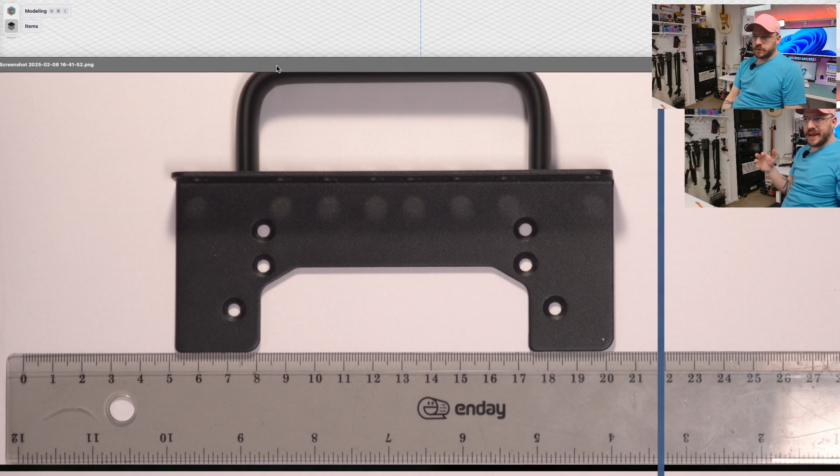This is my drafting software, Shapr3D. Any drafting software will do. So there's my picture, right? Having this ruler in the shot makes it so I can scale this perfectly with the drafting software.

So I'm going to move this out of here and come over to my drafting software. Obviously there's a good amount of drafting knowledge at play here that will take you a while to get, but I'll just show you the basics of what I'm doing.

Oh my God, please let me grab the fucking corner. Why are grabbable corners so small? Why are they so goddamn small? I'm just going to grab this image, and a lot of the time what I'll do, instead of trying to import the image into the drafting software, is just take the image on my computer and screenshot that. Except I can't grab the corners of this to make it bigger.

Okay, and yoink, coming over to drafting software, paste. No, drag and drop? I guess I do have to drag and drop, okay. So now I have this image in the drafting software. I'm going to move this up.

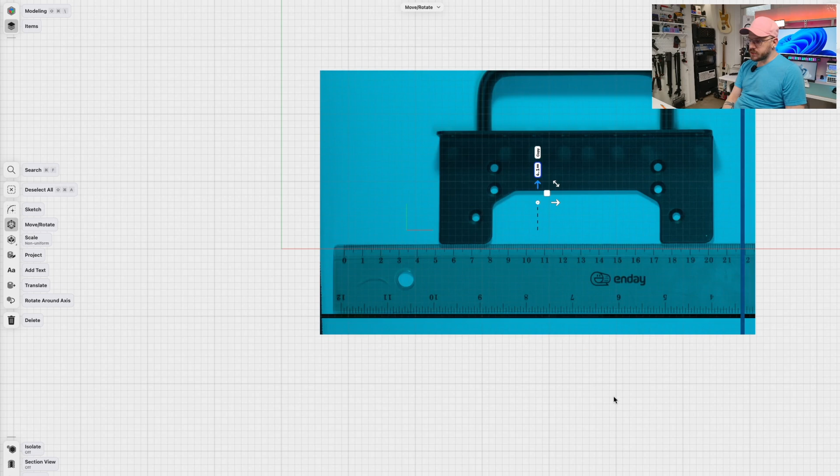A lot of times what you can do is, because I used guides in the image, this red line here, this axis, perfectly lines up with the ruler I have, which makes things super easy. Now, one thing I didn't do very smart is, usually it's a good idea to put the 0, the beginning of the ruler, at the edge of your thing so you have less math to do. So this looks like it goes from 7, 21, 22.

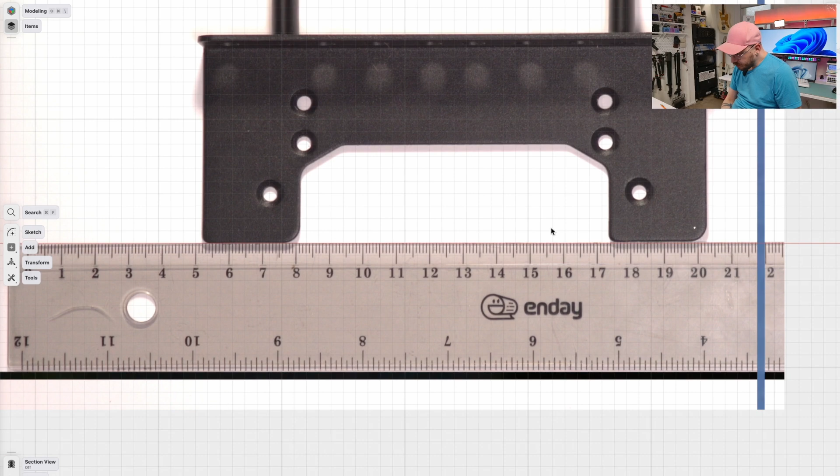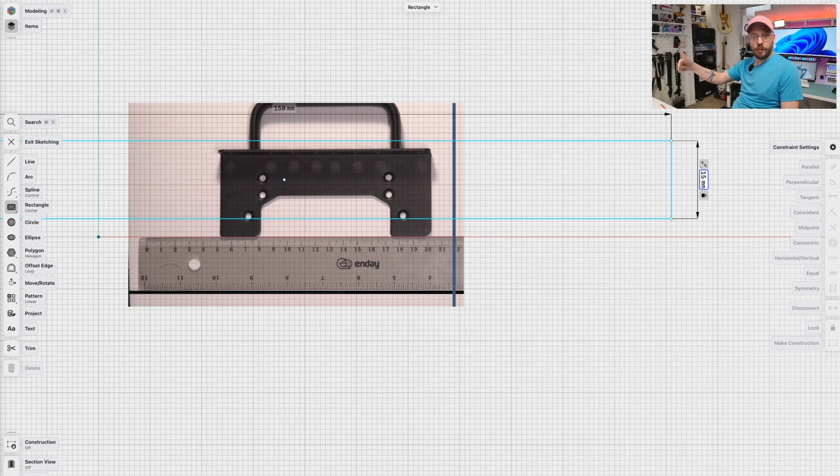So 7 to 22, so 15 centimeters, 150 millimeters. So what I'll do is grab a rectangle and do, nope, 150. I made another mistake—usually I have two rulers, one for the x-axis. Why am I not looking at the camera? One for the x-axis and one for the y-axis, that just makes it easier. So we're going to create this rectangle.

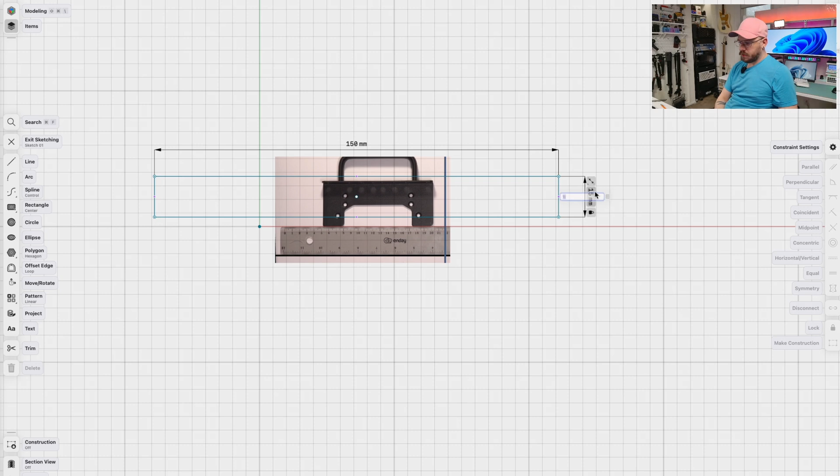Now, instead of redoing the whole photogrammetry process, I can just come over here and actually measure what the height of that image was. Again, this doesn't have to be perfect, it just has to be good enough—59 millimeters. So come back over here, edit the height, 59, enter, boom. Now I have the width and height of the bracket I'm looking for.

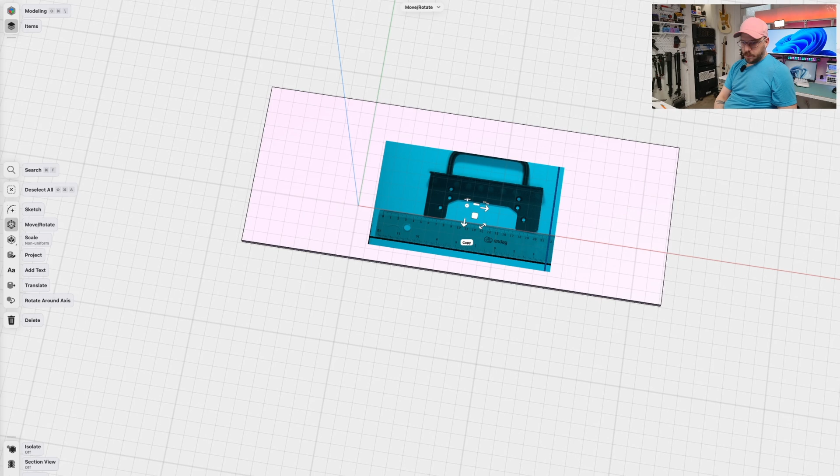So I'm just going to make this, let's say 4 millimeters tall. Even that's way too big, 2. Okay, bring this down. And now, come into here, we want to adjust the opacity of the image we imported. Okay, and now we need to scale this properly.

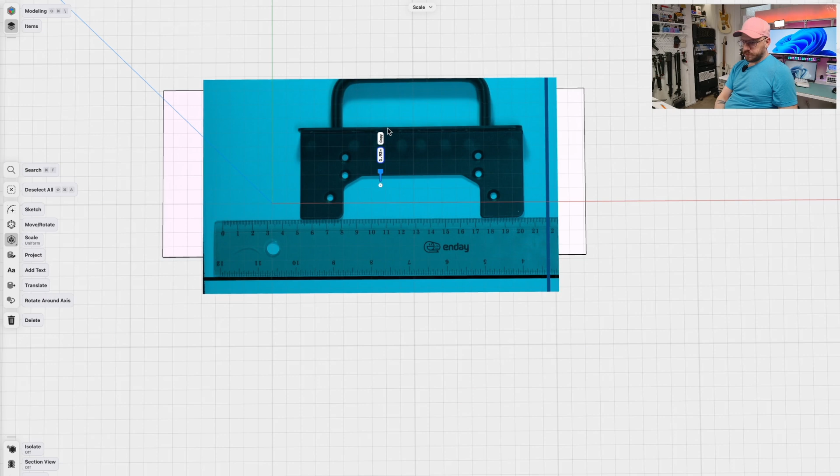Now, I haven't figured out how to do this easily within Shapr3D, because it's just difficult to try and get it scaled and centered. But I want to do a uniform scale—blow this up. Did this go back to 100% opacity? Why can't I see through it? No, it didn't, what the fuck?

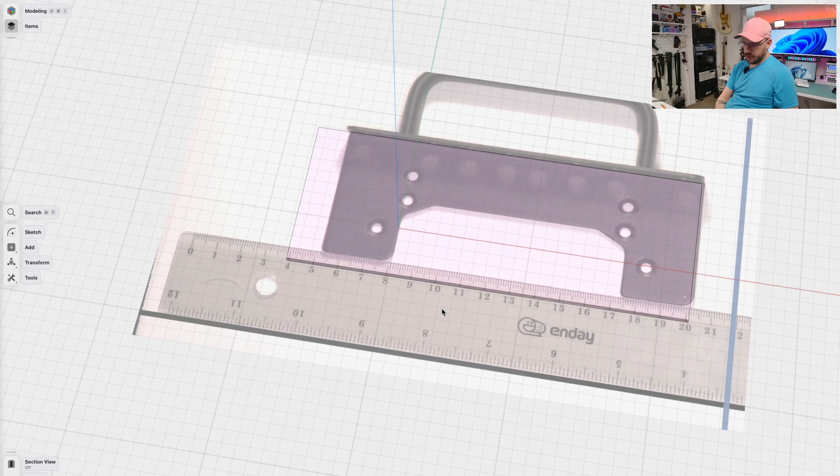Anyways, okay, so try to get it as centered as you can. Come over here to scale, blow this up. There we go, so that's kind of the image. That's kind of the issue with Shapr3D—when you have it selected, it goes to 100% opacity, which isn't great. So I'm kind of getting there. Move this over—maybe somebody watching this video will tell me a better way to do this.

We want to get an exact top. Now, because this item isn't fully flat and there's a little bit of height here, the more height your object has, the more distorted it's going to be going up to the lens. So if you look at what I'm working on here, you can see the edge of this plate is actually right here.

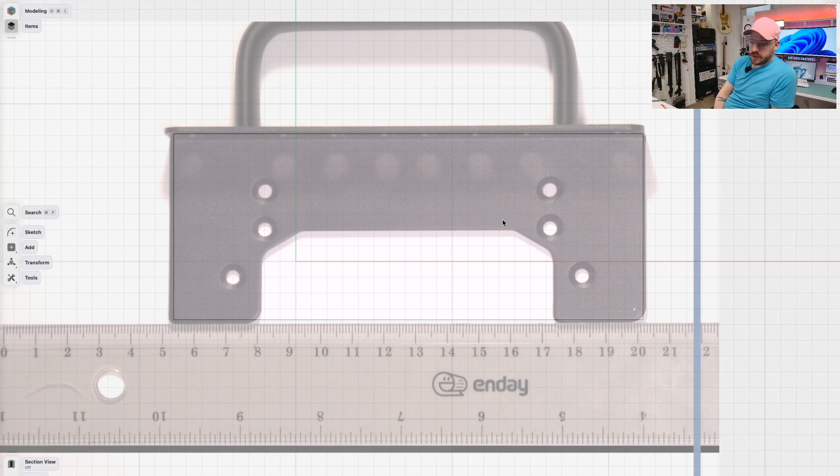It's skewed a tiny bit, but it's going to be within like a quarter or a half of a millimeter. So it's going to be good enough. Boom, that is good enough.

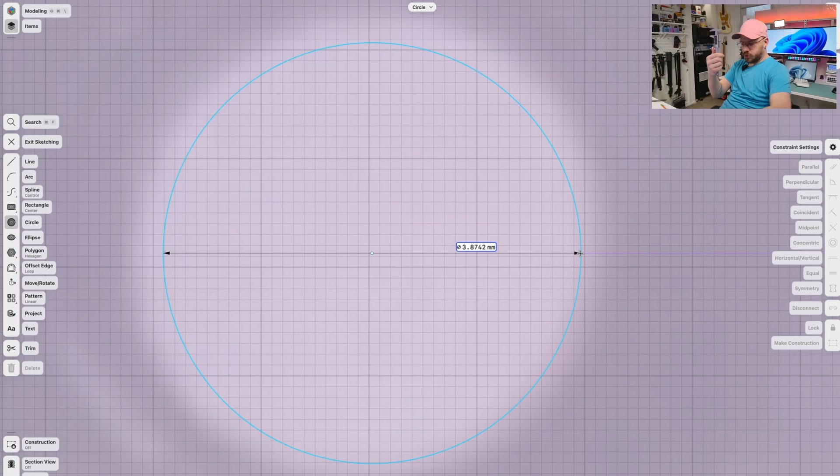Now, in order to replicate where those holes are, when you're zooming in so far, you don't need to be perfect. If you can just eyeball these things, let's say that's the center. And if you want the exact measurement of that hole, take those calipers, shove it in the hole, and you get, hey, that hole is 4 millimeters, at 4.07 millimeters.

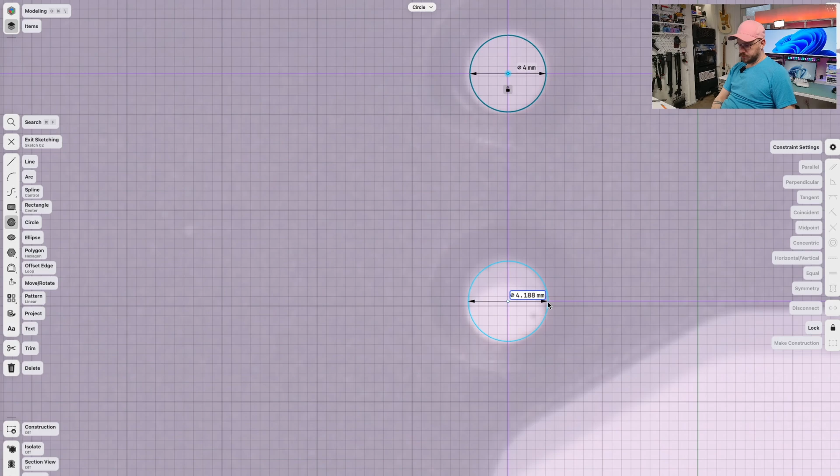But when it comes to 3D printing, you can only make adjustments so fine before it's not going to be able to print it. So there's 4, there's a 4 millimeter hole, there's going to be another 4 millimeter hole. Of course, there's more scientific ways to get these exact measurements. I'm not that smart, but this gets it to be good enough. Everything I've done so far has been good enough. Boom.

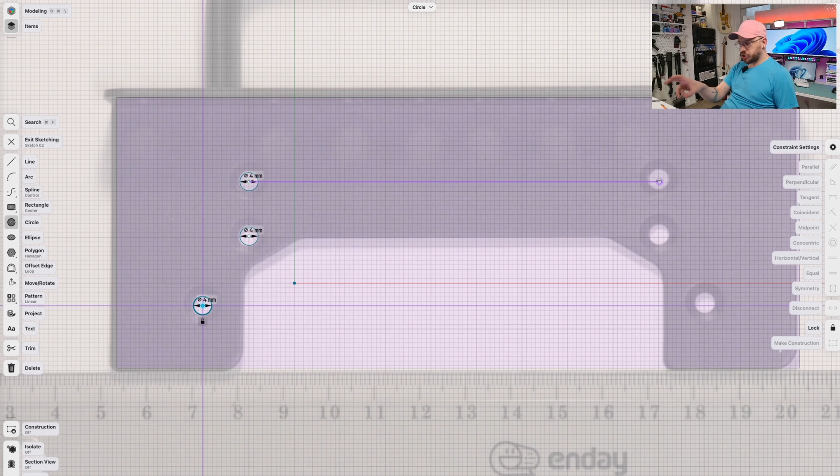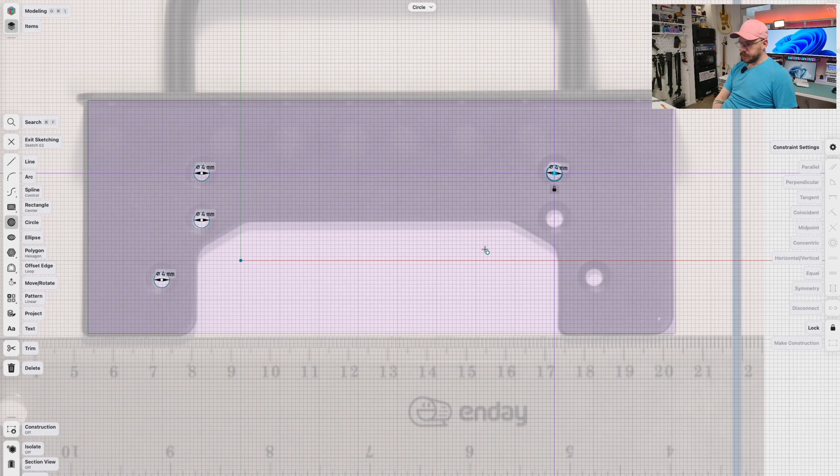There's the holes. And then you want to make sure the holes on the other side are lined up thanks to the snap guides. Just by following this snap guide, you can see the image I imported is just slightly twisted, probably a quarter of a millimeter off. That's not really going to be a problem because I know my draft is perfectly up and down, perfectly at right angles, so not really worried about it. I'm just going to make sure this gets close enough. That looks about center, again 4. Boom, perfectly lined up with those two, 4, boom, good enough. All right, got those dealt with.

So I can hide that image and then I can just make these holes. Zip, zip, zip, goodbye, there's holes now. Look at that, we're already halfway there.

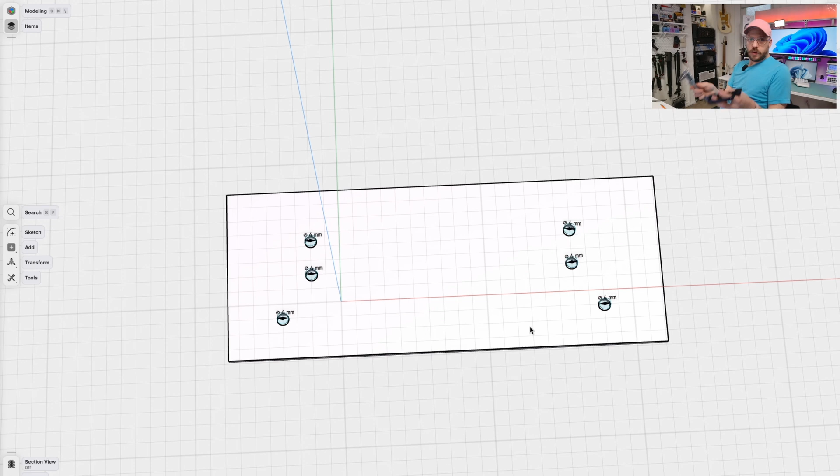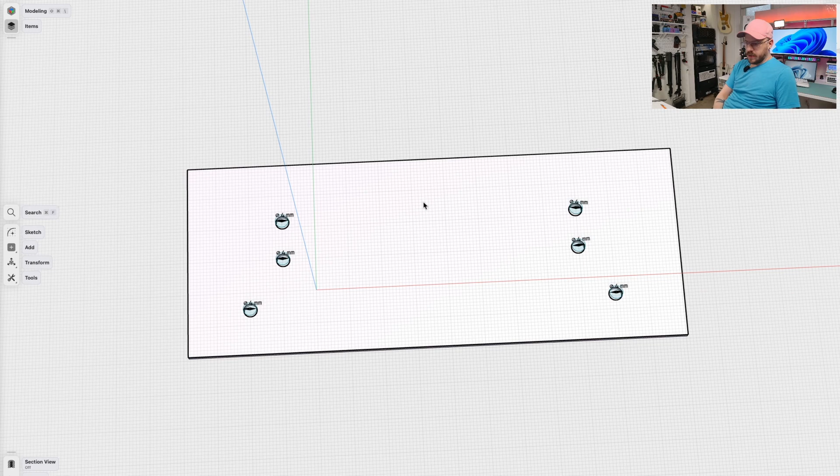So looking at this piece, I don't need to go into photogrammetry mode to get this measurement. I just want to know how thick this lip is. Grab the calipers, 2.2. Knowing my printer can only print at 0.4 increments because that's the size of my nozzle, I know that rounding it up to 2.4 is going to be fine. So grab a rectangle from diagonal, and I want that to be 2.4. Lock that measurement in, and then get how high it is.

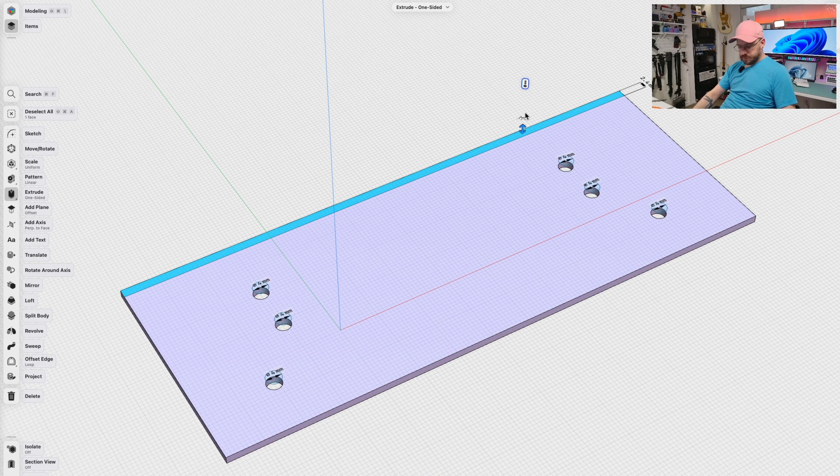21.6. Now, 21.6 is the outer measurement. Let's see, yeah, 21.6, so that's perfect. And then you can just keep building from there.

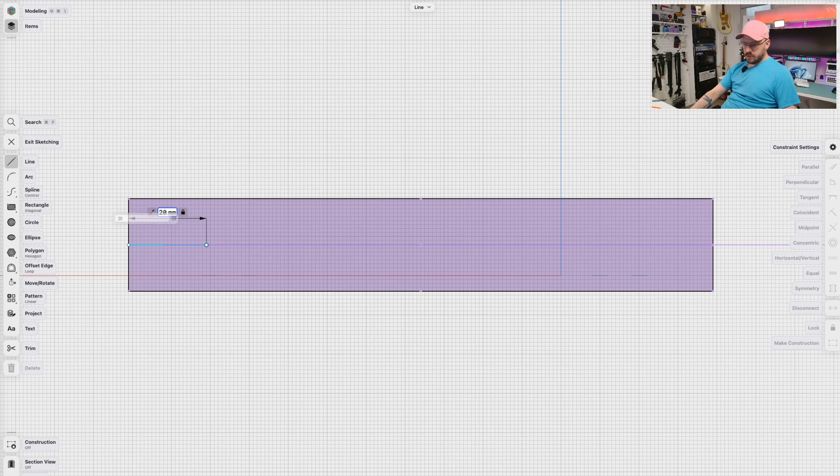Now, we didn't really get the measurement of the handle, but if I grab my calipers and go, okay, how far is the edge of this handle to the edge of the bracket itself? 20 millimeters. So if I come over to the side and measure 20 millimeters from the side, and then 20 from this side, and I know I'm going to make mine slightly oval, I just want to get the width and height of the thickness. All right, 8 by 16, 8, 16.

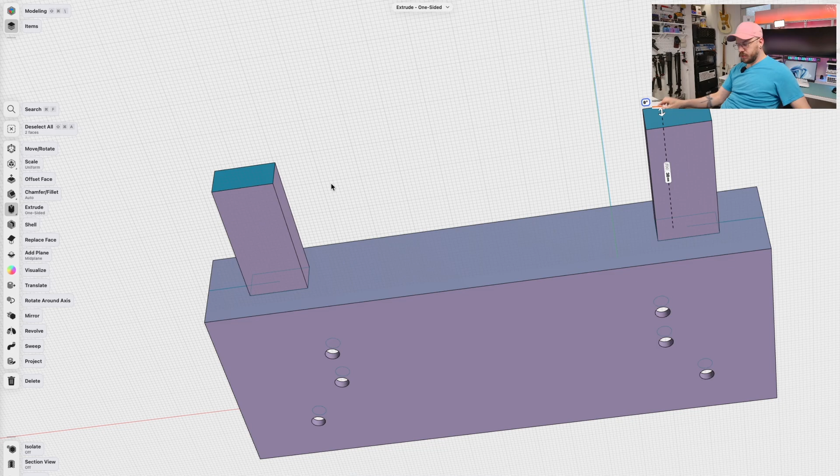Select both of those, figure out how tall this is, ish. I don't need anything exact, 38 millimeters tall, boom. And then for the handle, that spans from piece to piece, 8 millimeters. Okay, we're getting there. Fillet that edge, fillet that edge, fillet, fillet. All right, do that one. I'm just doing this quick just to show you. And look at that, we're pretty much 80% of the way done.

Now I've got about 78 designs under my belt so far, and it was only the past like 5 that I've actually had this entire rig for doing this. For all the other ones, I was just taking my phone, making sure it was parallel with the desk, taking the picture, making sure the rulers were in the shot, importing it in, and then drafting, pretty much just eyeballing things. If you zoom in far enough to where you're making adjustments at the 0.000 millimeter, you can just eye it and it'll end up working out. And if it doesn't work out, then you just redo it.

That's how it goes, but that is pretty much how I do all of that. Again, not a lot of tools needed. If you got a phone, if you got a camera, and got drafting software, you're pretty much there. And that is how I have done so many things. A lot of times, even if I'm not doing the photogrammetry route, I'm just taking this and measuring thing by thing and then drafting it down on paper.

I had actually started just outlining this device, this little bracket, on paper. And then I would take my measurements and draw out all of my measurements on paper first, and then start drafting it in software. But again, I'm brand new to this, I've only been doing this for about a year. I've only got about 70 whatever drafts under my belt so far, but this has worked out really well for me so far. So hopefully that is helpful.